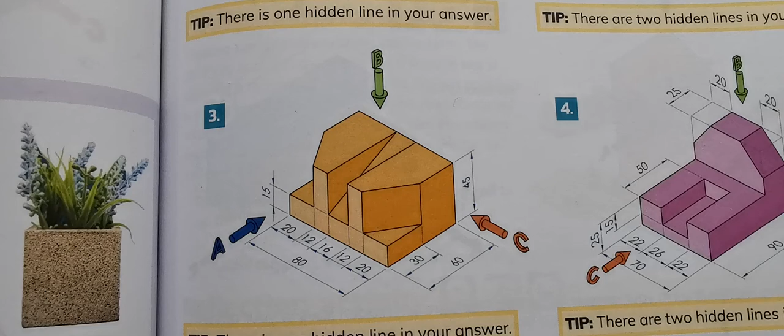Okay guys, gonna have a look here now at question 3. Now just looking, it's 80 wide, 60 deep and about 45 high. So it's more or less like 80, 60, 40 for the purposes of our freehand sketch. We'll keep that in mind.

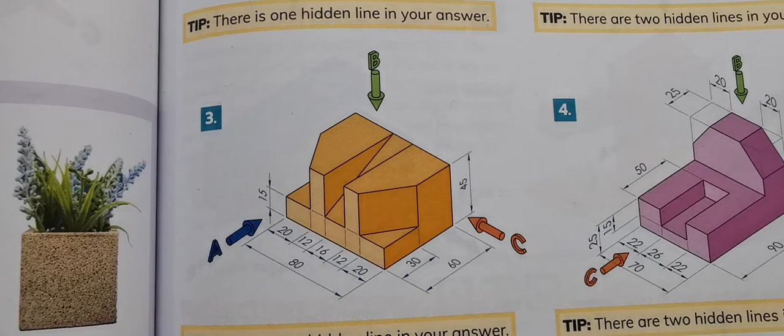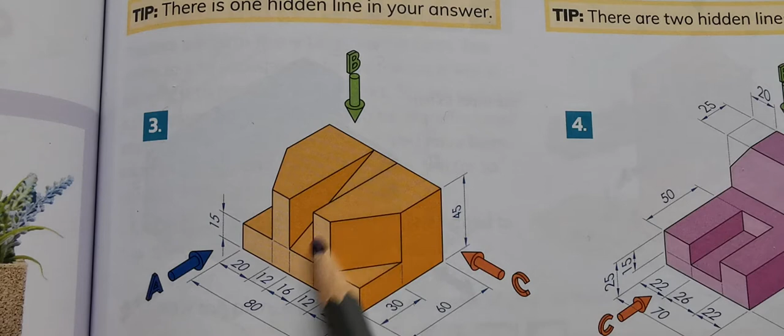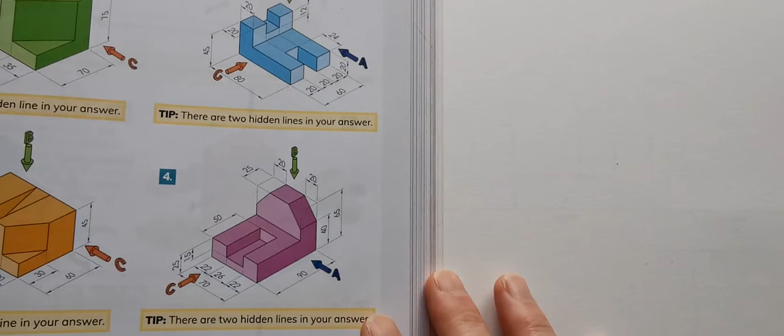So again, just before I start the sketching, we're gonna create it. I think chop off these corners and take those cuts down, and I think we'll just leave this cut in the center until last. I think that would be my strategy for doing this anyway. So just set that up there now. I'll just try and leave this camera where we can see both.

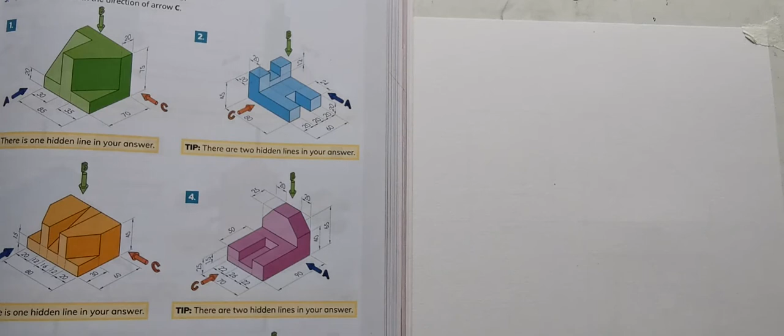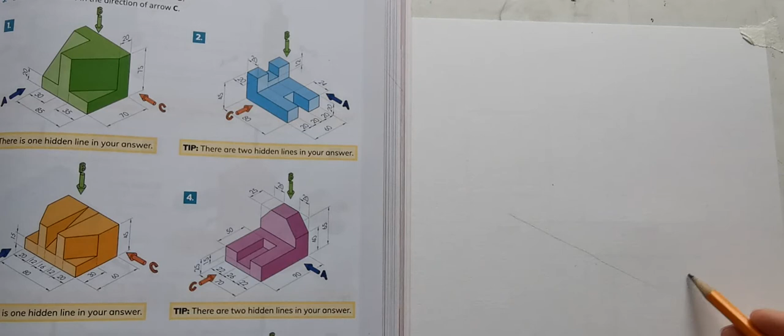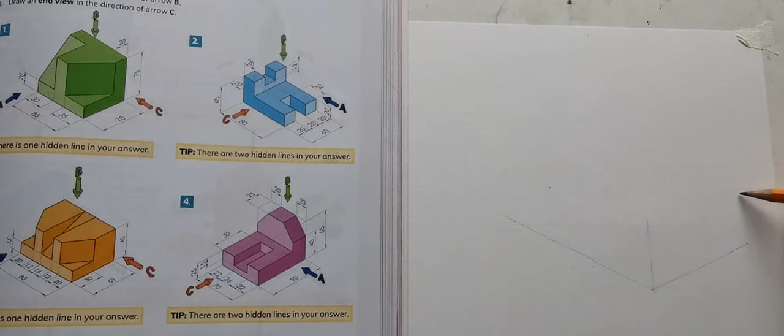So I said it was roughly 80 in this direction, so we're going to start off with our crow's foot. So it needs to be twice, whatever it is this way, because sorry, it's 60 in this direction, 80 in this direction. So say 60 in this direction, it needs to be a bit more than half of that, then would be about 40. So just sort of 45.

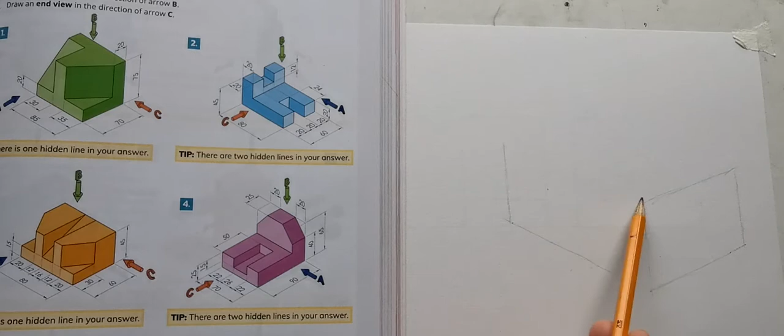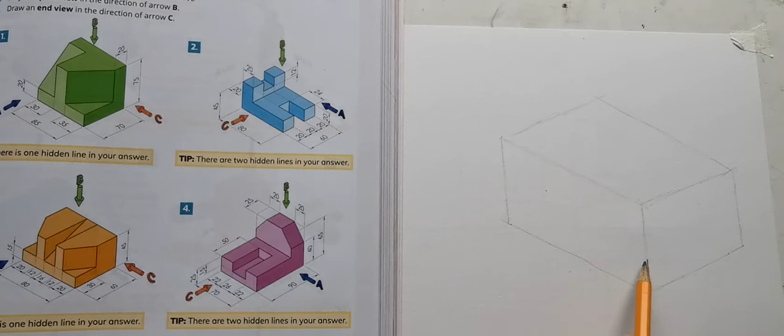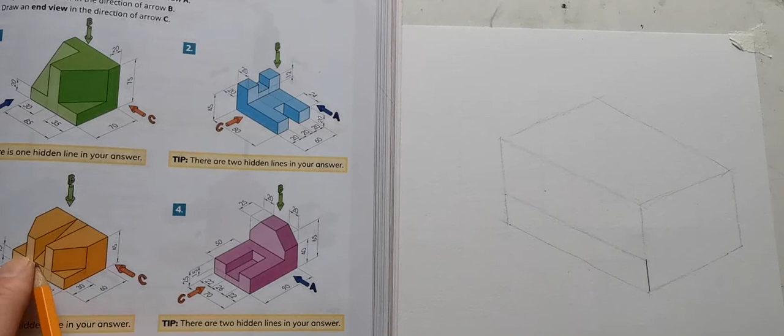So this is roughly our crate. Okay, so that's roughly our crate for doing this. So there's a block going up 1/3 here, so I'm going to start with that, and I'm going to take this line up 1/3 here. So that is that edge running along there, and I'm going to do this then on the top. So halfway back, this is back 30, which is halfway.

Now what I'm going to try and do here is this goes 20, 12, 16, 12, 20. So 20 is a quarter of 80. So I want to go on top here a quarter in. So if I just get roughly the middle of this, which is half, I'm going to put a dot there, and I'm going to halve that again. So that's a quarter, and that's a quarter. So those 4 dots there are roughly quarters, and the middle of the way is back here.

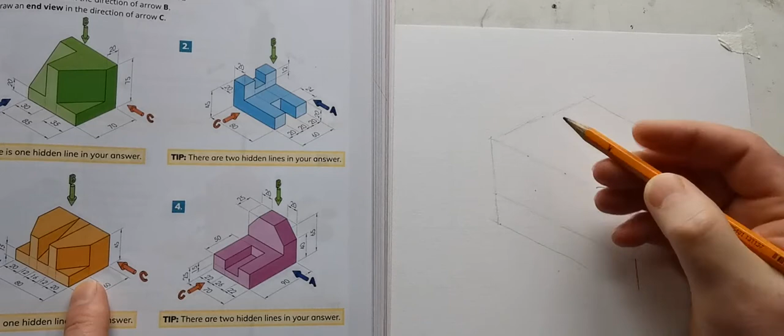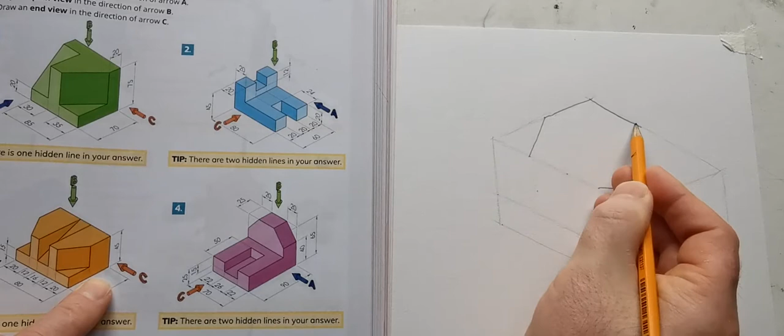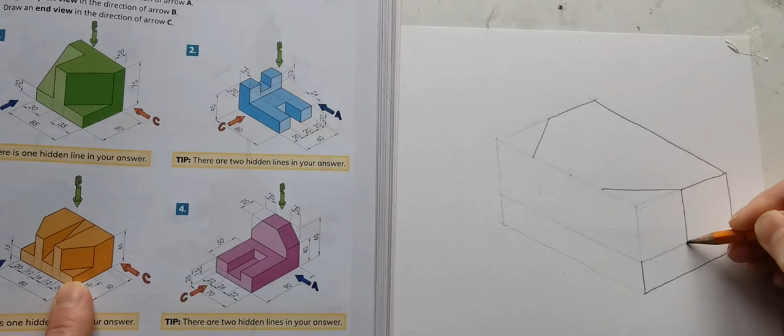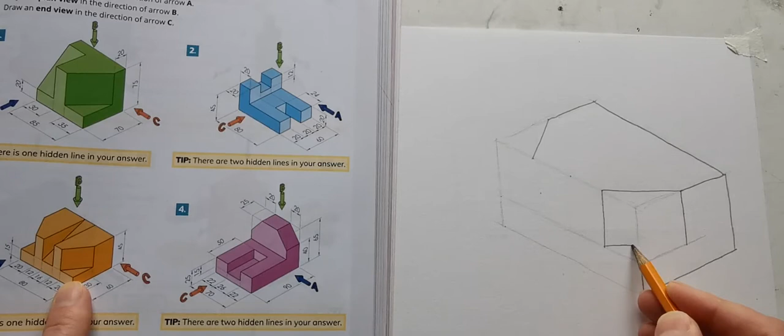This is that line here, and I'm going to do the same here now at the other side, going from the middle, a dot in the middle here, and I'm going to just heavy in the rest of the top of this. Okay, now the step that's going back here, I'm going to take this back parallel, and this comes down vertically, and this one over here also comes down vertically, and I can join them and I will just heavy in these.

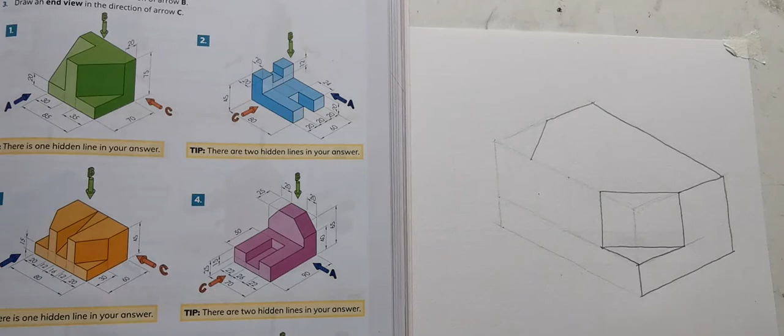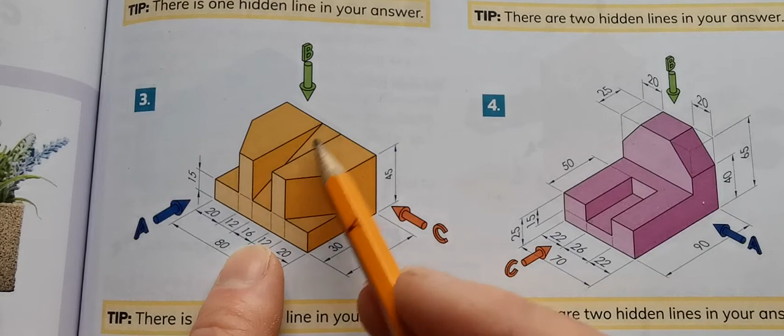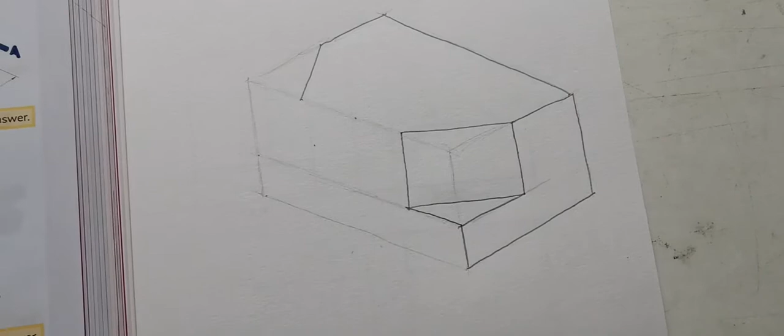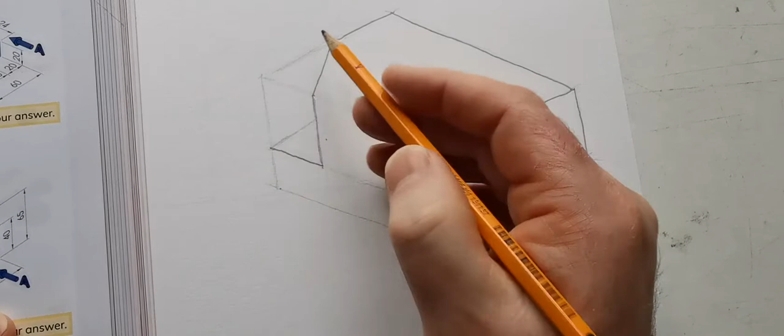Okay, so if I just zoom back in here for a second, we have this end done, we have this cut taken out of here. Now I want to deal with this cut back here at the other end next, and we leave that trench sloping down there until last. So I'm just going to take out, this comes down vertically, and then it's heavy over to here, and this just disappears back here parallel to that, and I can now heavy in all this bottom line along here as well.

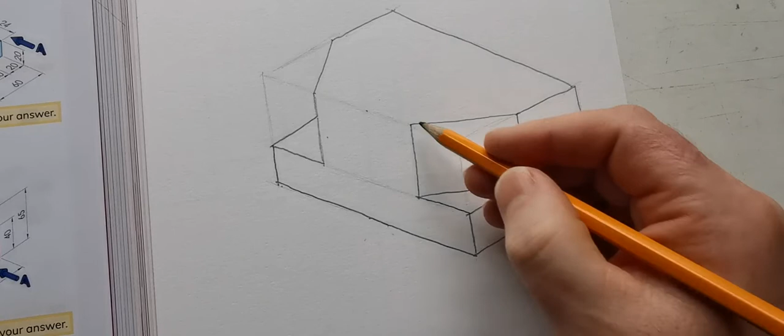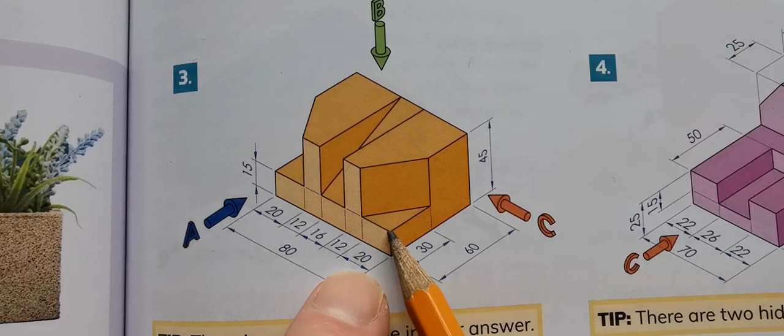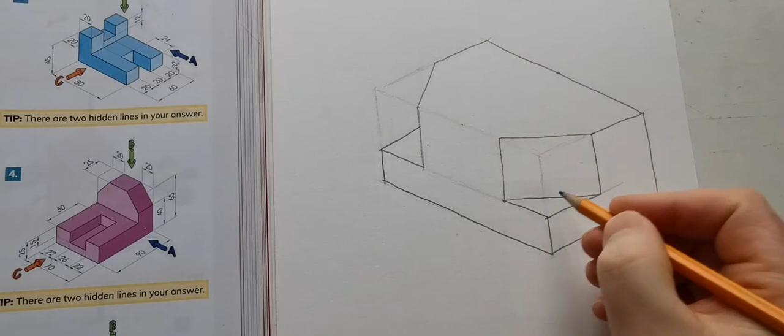Okay, so we now have everything pretty much done except for this. Now the trench that's cut out along here is 16 in the middle there. So it's a small bit narrower, we are just guessing here, than the step here, which is 20. So what I'm going to do now is find the center of the back here. So this is the middle of the back. Just put a dot there, and this is the middle of the front, so when I come down here, that's the middle here.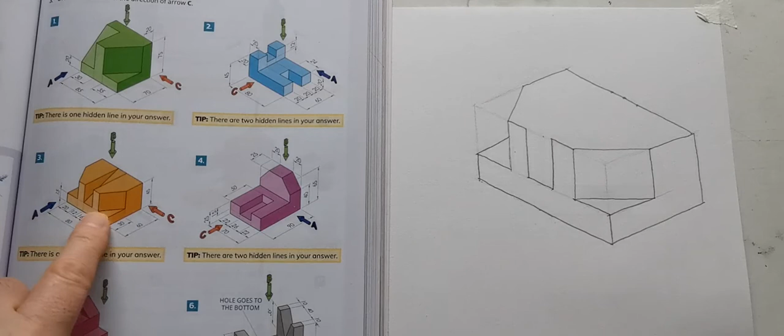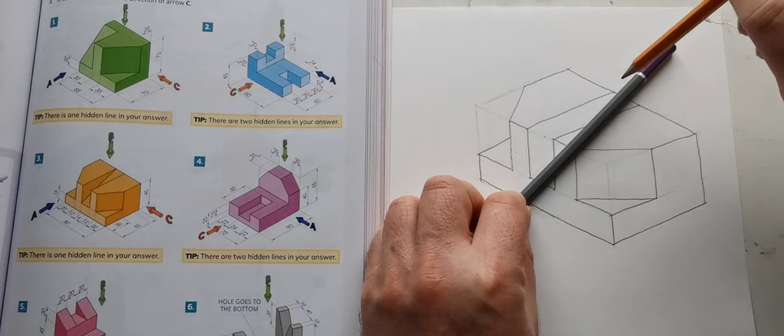So now what to do next? I'm going to get this angle, and I'm going to take this back. And I'm going to take that one back. And I'm going to heavy these in. Now I normally would say let's do this freehand, but I would forgive people if you wanted to get the line there and go over it freehand, because that's a bit difficult for second years, that's a difficult sketch. So that's our shape.

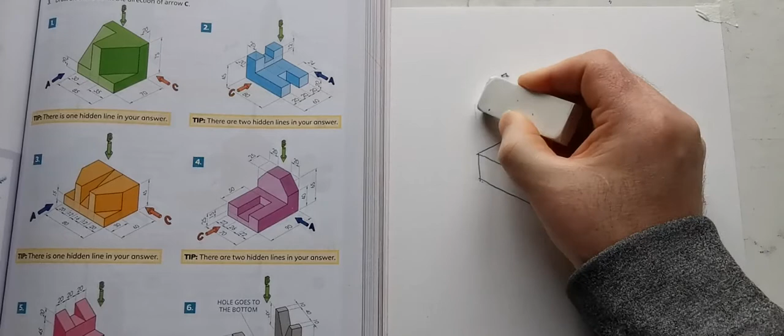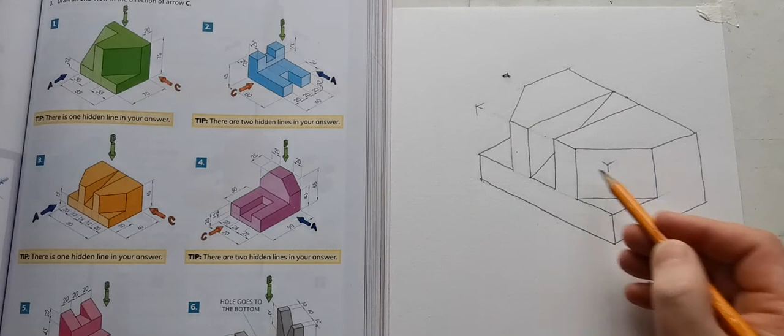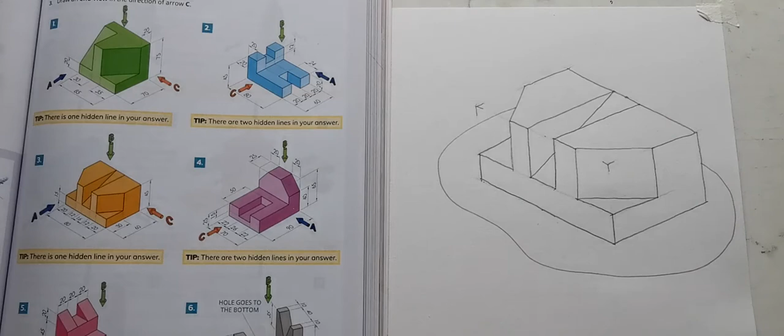I will remove some of the crating lines here. Now a nice thing to do when you're getting rid of the crating lines is you could just leave the corners, see that corner there, you could just leave that there and leave this here so that whoever is looking at it will know that you used crating. So our next thing, we're going to put a surface on the ground again, and we're back to our colouring.

Okay guys, I'm just finishing off the colouring of this here. There's a lot of surfaces on this, so I didn't overdo it with colours. Okay, I'm just gonna go a little, lead is broken here, 1 second.

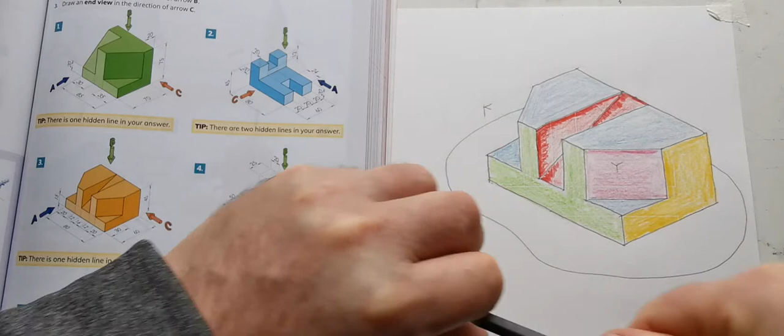So I'm going to just heavy in the edges there a little bit more. Just go a tiny bit darker along by the edges there and just blend it in a bit. Okay, so right, so we're good to go.

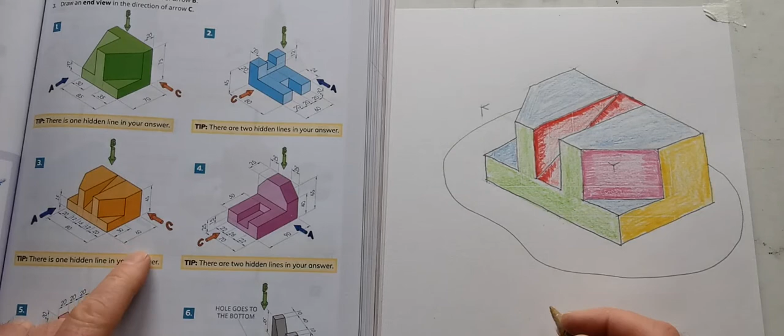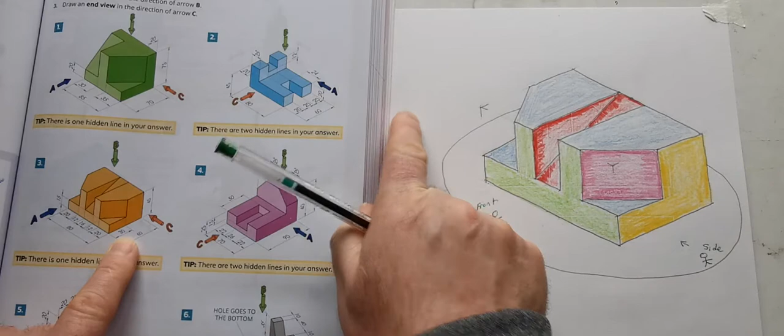Now the last thing, before we start drawing out, and it is very important, is which is the front and the side views. So this A is the front, and the side view is looking in from here. So we know now the side view is looking to the left, so it's going to be drawn on the left.

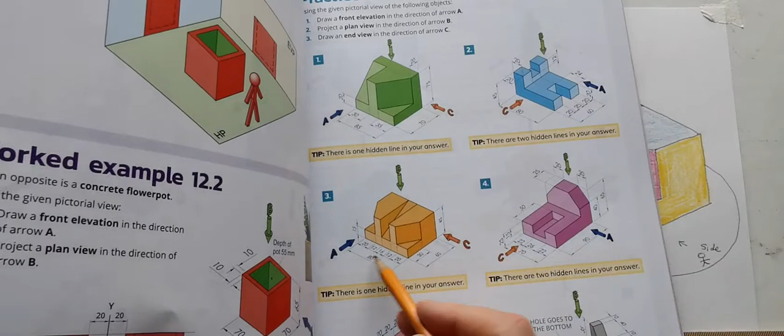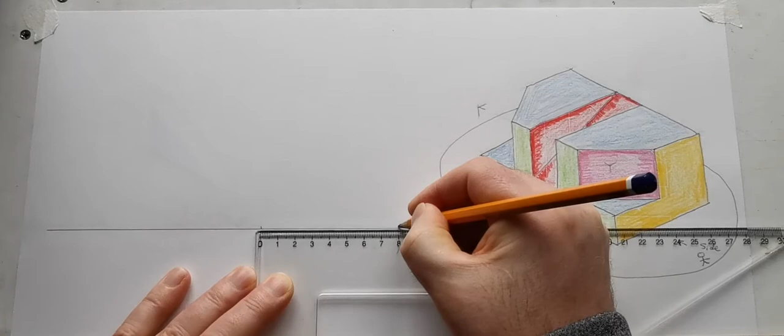So I'm expecting people now to be getting a bit better at the front, top and side views. Here's our ground. Now, just to remember one or two measurements there. So it's 80 wide, 60 deep, 45 high. So 80 wide. So I want to start this over here close, 80 wide, 45 high. So there's our front view,

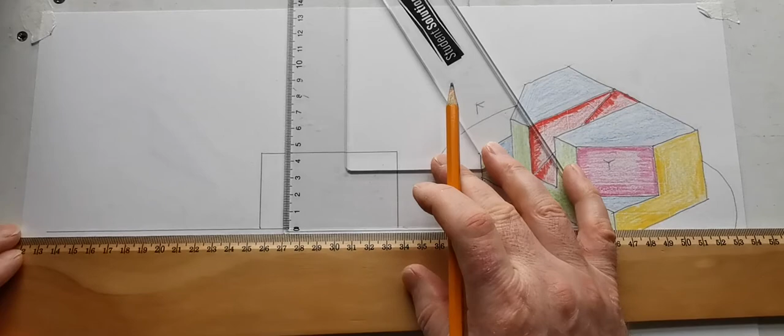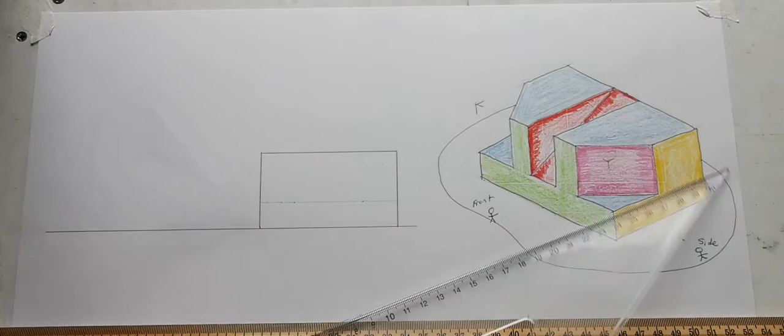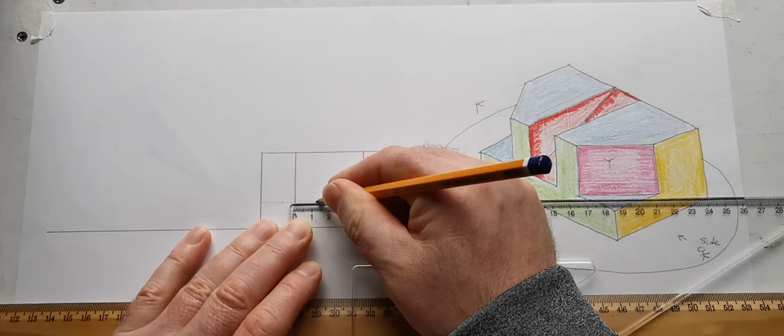and this step up here was 15. So I'll put that on light, and it was coming in here 20 and 20. So just put a dot 20 and a dot 20, and they go up. And then these next two were 12 and 12. So I'm going to fill in that space in the middle as well.

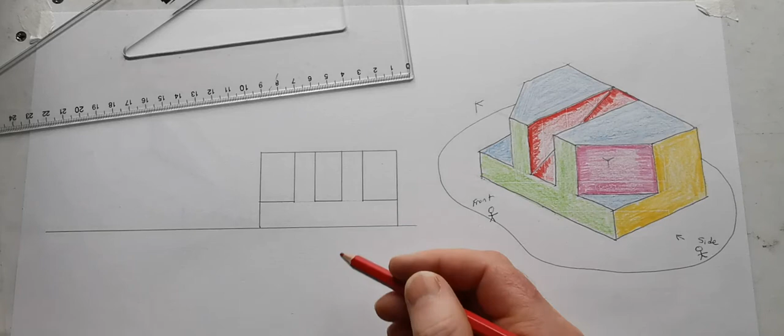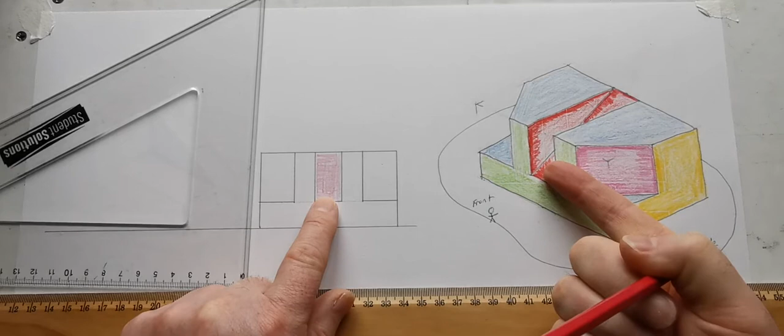Okay, so I'm going to not do the colouring of this for a while, but that's green, that would be pink. The edge up here is blue, and the red. The only one I will put in, I think, is the red here, alright. So I'll finish it off in a minute, but I'll just start that off there. That there is our slopey surface going up here. Now, that's the front view.

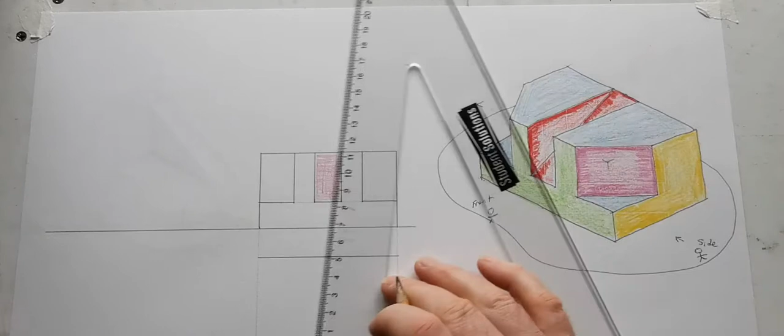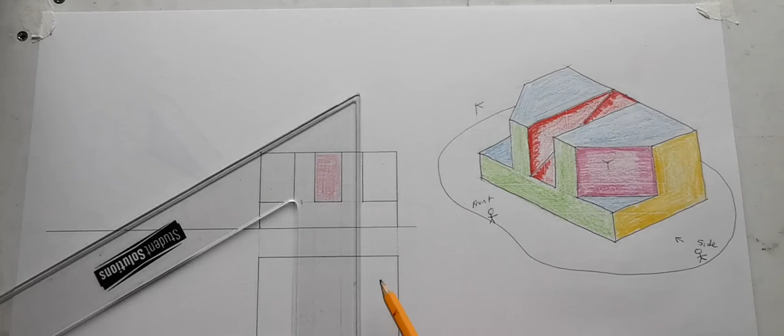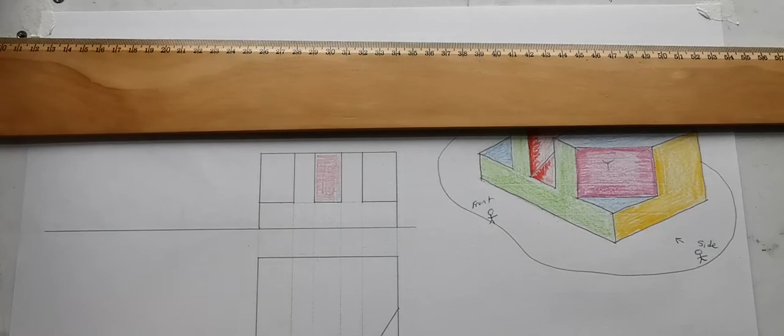Project down our lines for the top view. Leave about 20 here. Now from the very front to the very back was 60. So again, we want to project these down light. Now, the cuts here, we're going to the middle, which is 30. So that is going to here. The other side, I'll just mark that across.

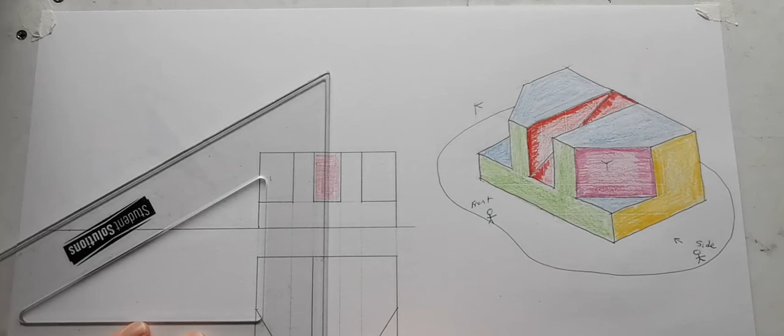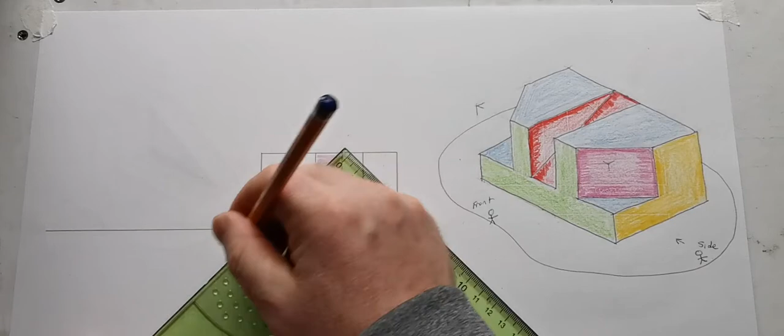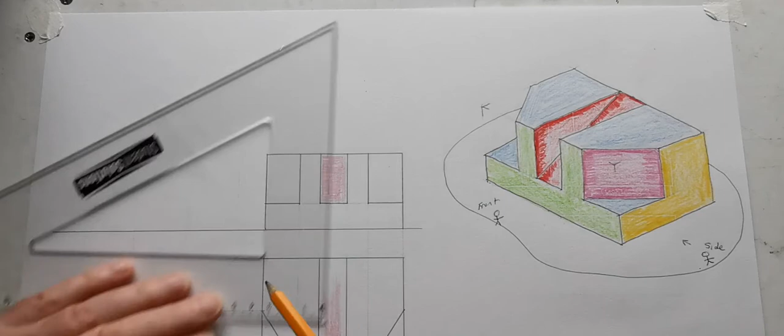So there's the two cuts, and finally I just heavy in the red slope, which is going to look like this. So again, I'll just mark in that slope here. That is going to be all red there. Now finally, for the 45 degree set square, so we project these over, and I'm going to bring this centre one as well, and then up. Heights across.

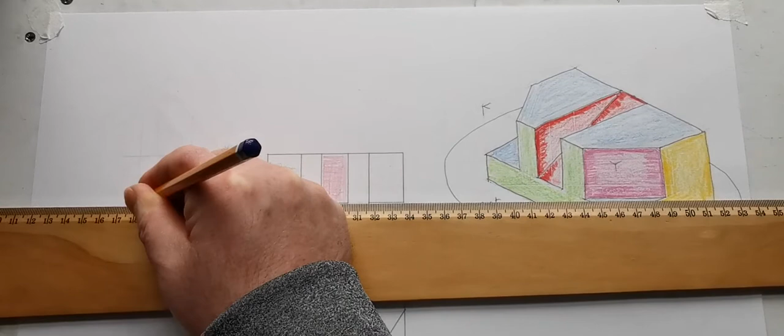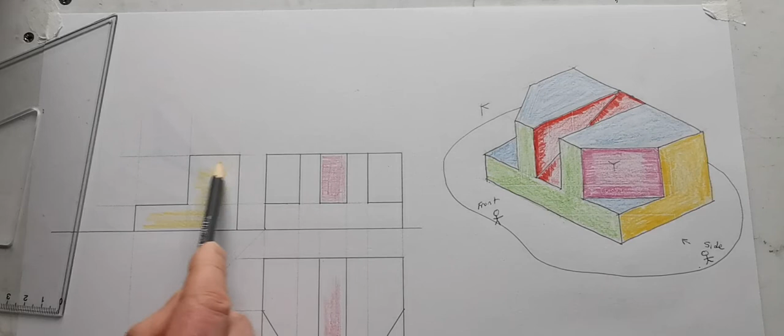Now looking in from the side, I'm going to see this big yellow L first of all. So it goes all the way up. So now I'm going to just do the L first, even though I could have heavied in the whole rectangle, and maybe I should have. The side view is a bit tricky. So look, there is the L. Now next I'm going to see the pink. So I can complete now my rectangle here, because that's going to look like that.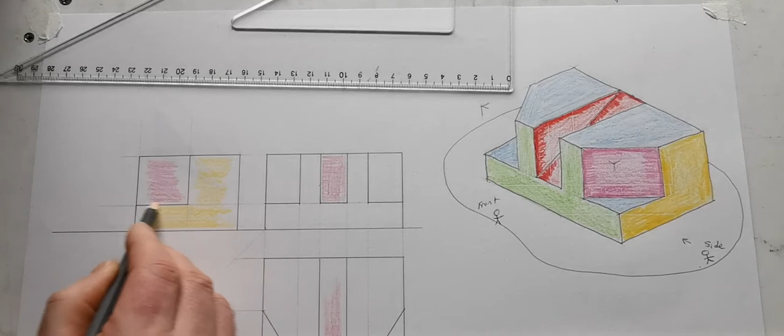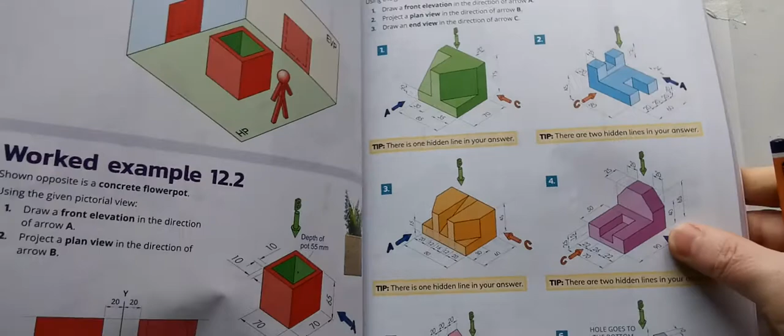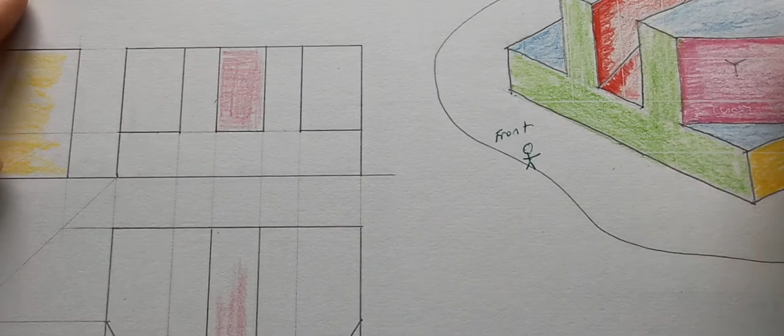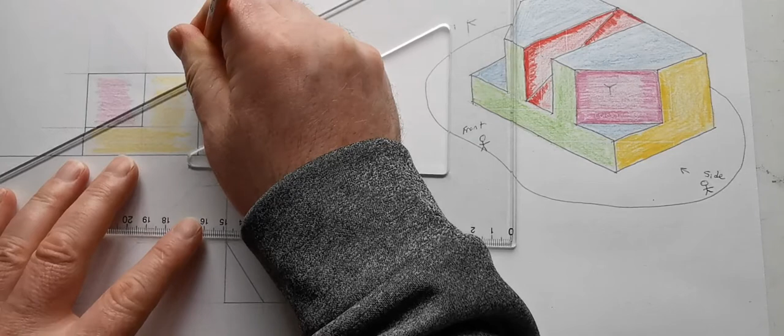That's the pink. Now, the one thing there, and it says it now on the question. I'll just go back to the question for a second. Okay, so it says there is one hidden line in your answer. Now, the hidden line is that sloping trench taken out of this, looking in from the side. So we need to show that with a dotted line. And we know it goes from the very top here down to the 15 down there. So it's going from here down to there in the side view. And that's a heavy dotted line.

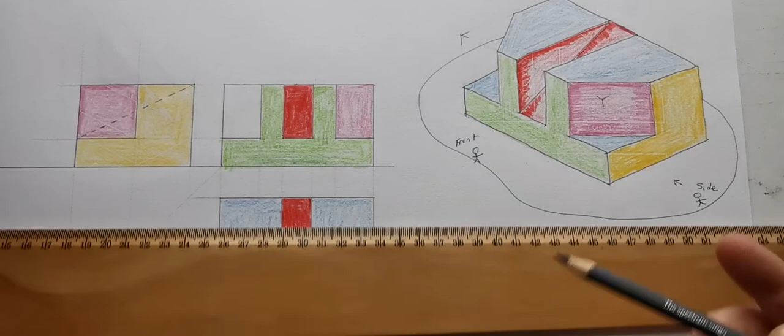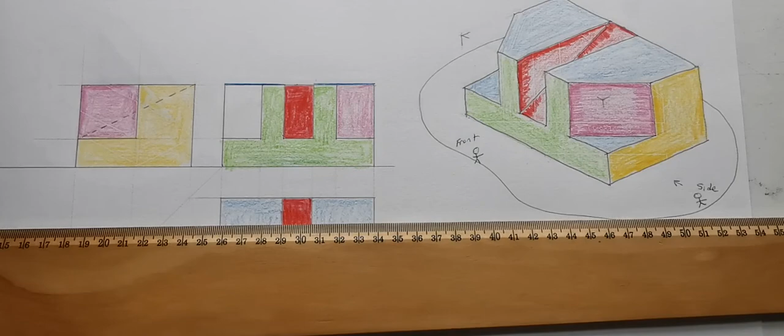So I'm going to leave people to do the rest of the colouring and stuff there. I will pause this. So I have most of the main colours on here now. The top of this now is blue, but interestingly there should be a red bit in the centre, or the blue doesn't go all the way across because of that trench. Now the yellow at the side, there's green along the front.

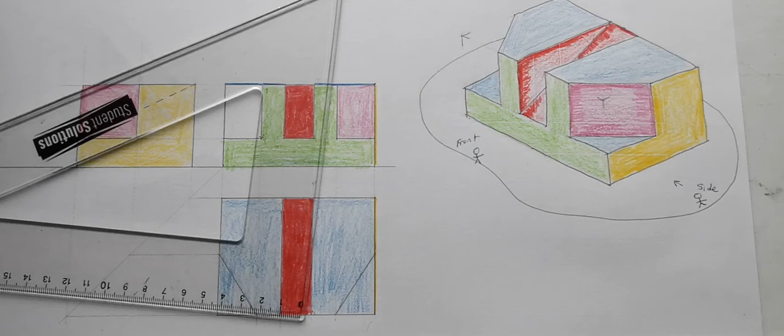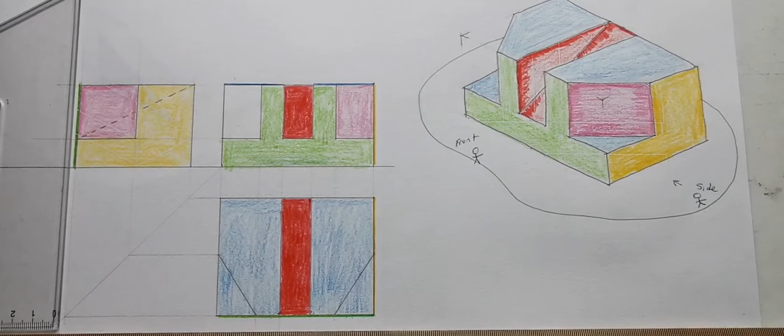Now I won't, I think, bother putting in all of the colours here, but I think it's good to put in a few. So that green runs all the way along the front, and when you follow that over in the side view, that green would be there. The blue would be along here. So let's put in a few of them anyway, and the last one I will put in is that pink surface there. I will put this one in, alright. That.

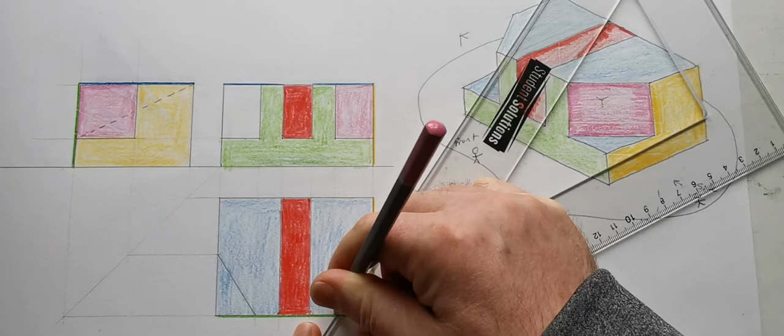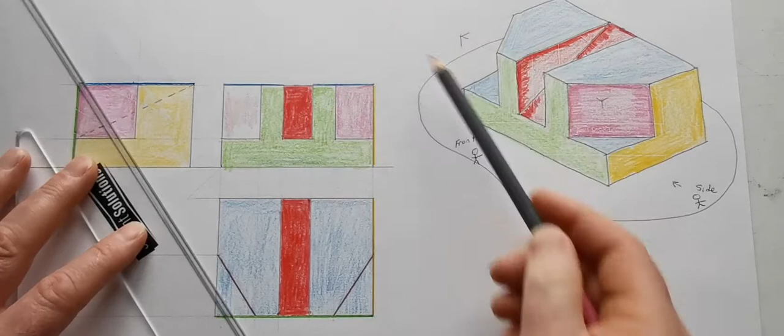And we don't know what colour this is, but look, if you wanted to be symmetrical, because the rest of it is, you could say, look, that one's probably pink as well. Even though we don't know for sure because we can't see it.

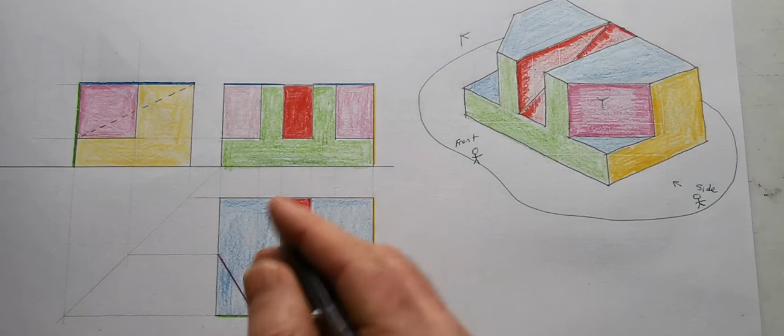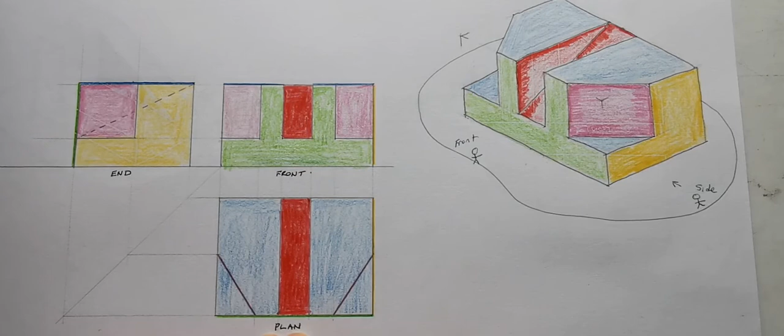So I'll just label these drawings here now to finish. So here's our front. Here's our top view, which is also called a plan. And here's our end view. Now that could also be called a side view. So front view is called elevation sometimes, top view is called plan, side view is called end view, and this is our 3D.